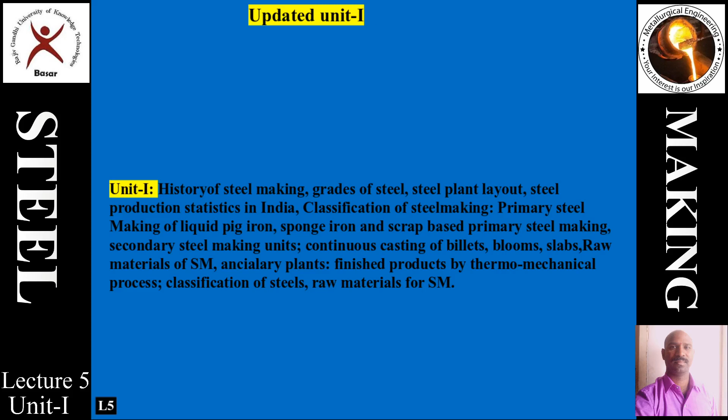Welcome to Making and Treating of Steels course. Please note that this is the updated Unit 1 syllabus. There are minor changes added to make it the updated syllabus for Unit 1.

Coming to the typical classification of steel, it is done based on composition. Based on the carbon range, plain carbon steels are further called low carbon, medium carbon and high carbon steel, and mild steel. Based on the alloying addition, low alloy addition, high alloy addition. Low means 5%, high is greater than 10%, medium is 5 to 10%. These are called alloy steels.

Based on the addition of chromium and nickel, you can make steel stainless. That is why it is called stainless steels. Based on the percentage of tungsten alloying element, the steels are called tool steels, such as cutting tool steels. Coming to the production method, based on the LD converter and continuous casting process, it is varied.

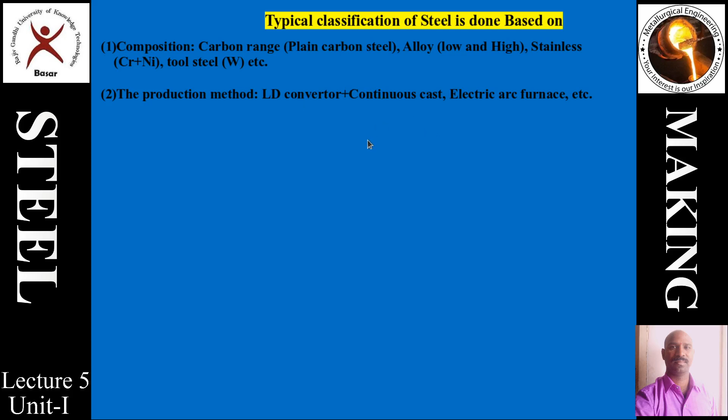Mainly plain carbon steels are produced, and from the electric arc furnace you can produce alloy steels, special steels, stainless steels, many things. Even with a combination of LD converters, the argon oxygen decarburization process and vacuum oxygen decarburization process, you can convert the steels to inclusion-free steel, special steels, stainless steel, duplex steel and triplex steels.

Coming to the finishing method used, it is called extrusion method, forging method, cold rolling and so on. Going to the form or shape of the product after finishing operations, such as wire, bar, rod and so on. These things are eligible for the manufacturing industry. It can go as a sheet to the car outer cover, and it can go as a train track rod from this particular structural material. It can go to the automobile industry.

In the deoxidation process, aluminum strips are added to remove oxygen in steel making, and based on the removal of the oxygen percentage, it is called killed steel and semi-killed steel. If partially removed, it is called semi-killed steel. If oxygen is completely removed or only a negligible amount remains, it is called killed steel.

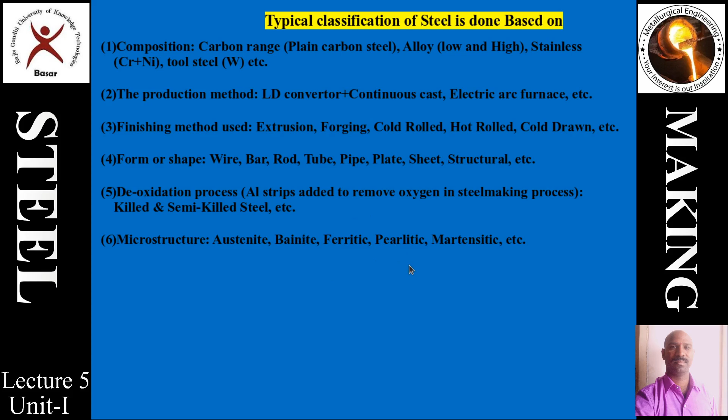Coming to the microstructure, based on the parent microstructure austenite and ferrite, these steels are called austenitic steels and ferritic steels or stainless steels. Based on the process adopted, such as heat treatment process and continuous cooling transformation, time temperature transformation, the steels may vary to bainitic steels, pearlitic steels and martensitic steels. These are phases transformed from the parent phase, such as austenite and ferrite. Bainite, pearlite and martensite are phase transformed microstructure steels.

Coming to the physical properties, mechanical properties and electrical and thermal properties, the steels may vary based on standards such as the ASTM standard. Based on heat treatment: normalizing process to improve the ductility, hardening process to improve the hardness, annealing to improve the strength, tempering to improve the precipitation hardening process. These processes are adopted to convert the steels into further eligible properties for the application.

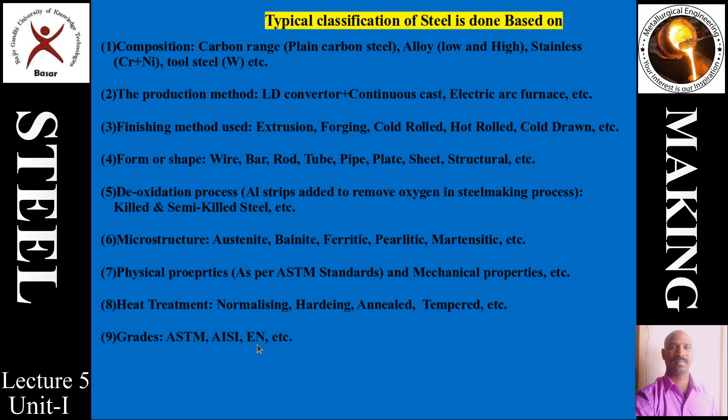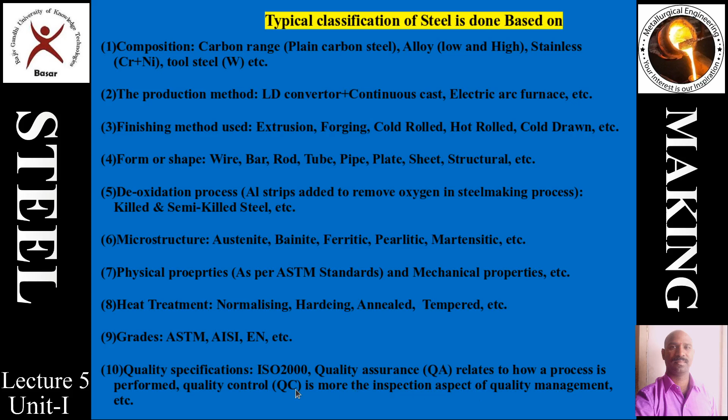Coming to the raw materials for steel making: a source of metallic iron, for example liquid pig iron, and oxidizing agents. Pure oxygen is purged in the case of the LD converter process, and flux such as lime is added to remove the impurities in the form of slag, to convert the impurities into slag and allow it to float on the top of the LD converter or ladle while you are pouring the liquid steel.

And source of heat, it could be the chemical source, it could be the thermal source. For example, in the case of LD converter, the liquid pig iron, the thermal heat develops; it is the source of heat in the case of LD converter. In the case of electric arc furnace, electrical energy is supplied from outside; it is the source of heat.

And further, deoxidizers, so adding the aluminum, it maintains the temperatures during the tapping towards continuous casting process. Aluminum forms as aluminum oxide. It floats on the top of liquid steel in ladle. It forms immediately in solid form. You can remove the oxygen. Further oxygen is removed in the hot metals such as liquid steel.

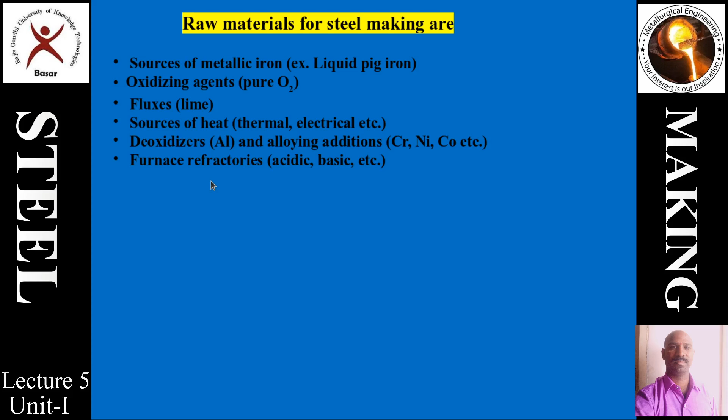Coming to the source of metallic iron, molten pig iron is also called as hot metal. If phosphorus is less than 0.05%, it is called Swedish iron. If it is greater than 1.5, it is called Thomas iron. Usually phosphorus is supposed to be 0.2 to 0.4 once you produce from LD converter. Steel scrap and sponge iron are other sources of metallic iron for the electric arc furnace.

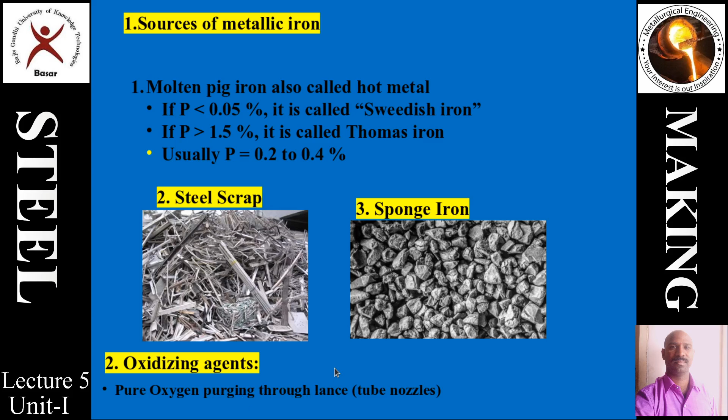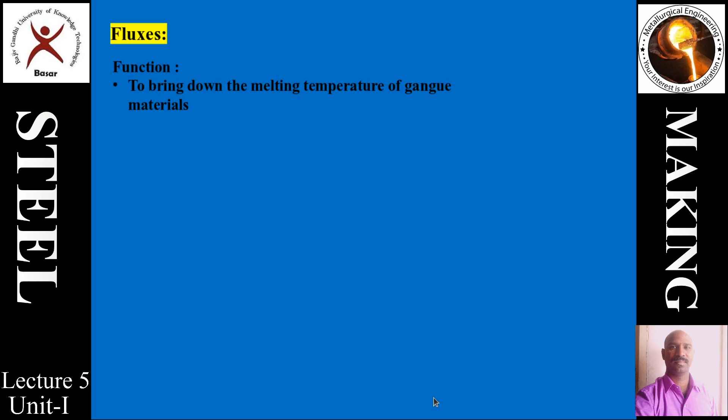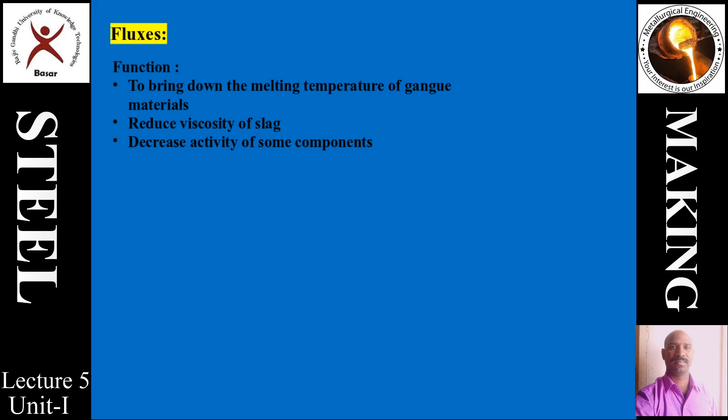And oxidizing agent, pure oxygen is used through lance. In the case of LD converter, lance is nothing but tube or nozzles. Coming to the fluxes, what is the main function of flux? To bring down the melting temperature of gangue or impurity materials, reduce the viscosity of the slag, and decrease the activity of some components such as activity of silicon, activity of manganese, so that in the form of impurities it will float on the top and it can be removed easily.

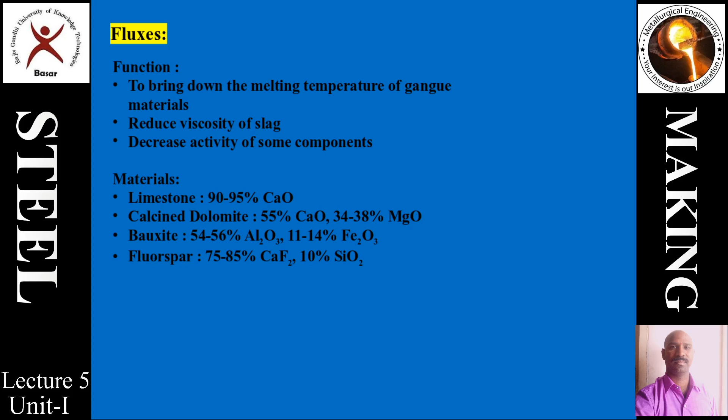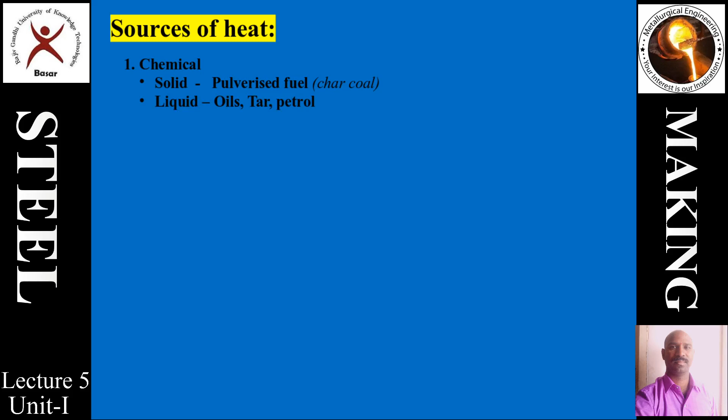And example flux materials: limestone, calcined dolomite, bauxite, fluorspar. These variety of materials are used in practice in the present integrated steel plant as fluxes. Going to the source of heat, chemical source, it could be the solid by using pulverized fuel such as charcoal, and liquid such as oil, tar, petrol, and gases; producer gas forms in the case of sponge iron production process. And blast furnace gas is also a source of heat. It is being used in the steel production process.

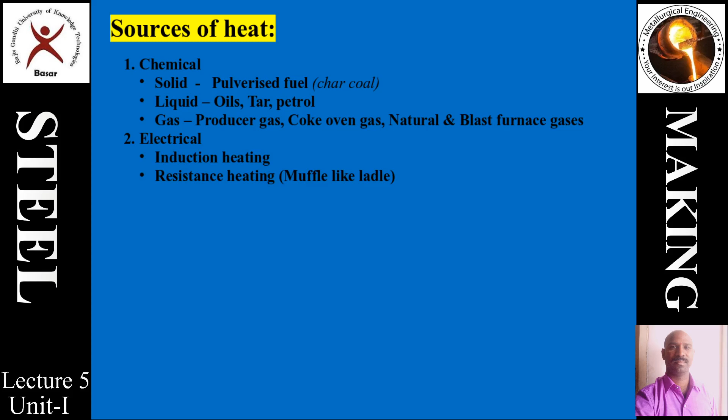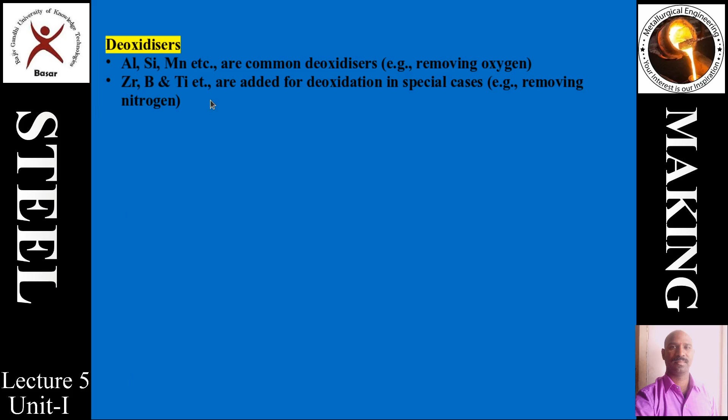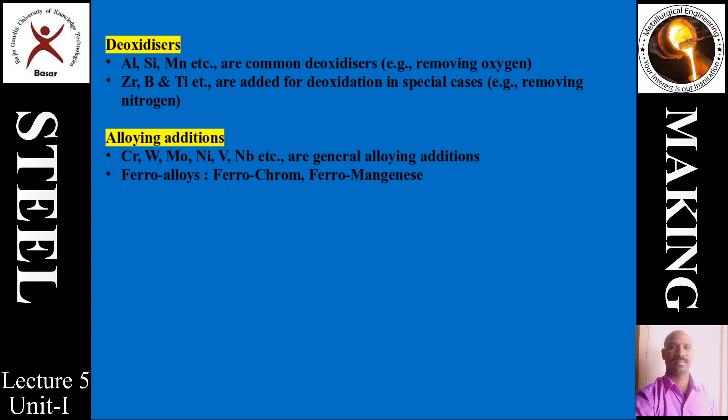Electrical, it could be the induction heating or resistance heating such as muffle like ladle, and arc heating process. Going to the alloying additions, some deoxidizers to remove the oxygen, aluminum, silicon, are used. To remove nitrogen, zirconium, boron, titanium are used. And some alloying additions, chromium, tungsten, and so on are used. Ferroalloys: if chromium and iron is more percentage, it is called ferrochrome, or ferromanganese.